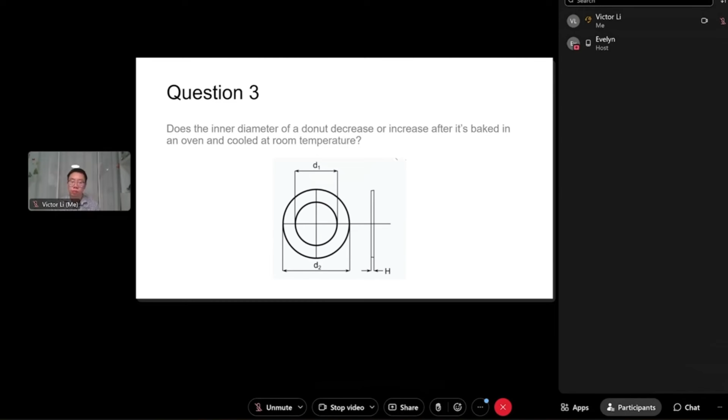I've done about 70 to 100 interviews for various mechanical engineering roles across the United States and China at startups, medium-sized, and global 500 companies. As you can imagine, I've been asked all kinds of different questions. Some were easy, but the majority of them were pretty challenging.

There were even a few that were irrelevant to the role. So in this video, we're gonna walk through and answer the most commonly asked mechanical engineering interview questions based on my experience. If you have an interview coming up soon for a mechanical engineering internship or full-time position, be sure to watch to the end because I'm gonna help you ace your next interview.

I like to sort all interview questions into three broad categories. First is general non-technical questions. These are more open-ended questions that help the interviewer understand you as a person, your motivations, and your career goals. Tell me about yourself and why do you want to work for us are two examples of general non-technical questions.

The second is, of course, technical questions. These test your skills and knowledge by asking you to apply math, physics, and engineering principles to solve a problem. Some examples could be: perform a tolerance stack-up analysis on this assembly. What are the advantages and shortcomings of injection molding and 3D printing? When does it make sense to use injection molding over 3D printing and vice versa?

Third is behavioral questions. These focus on how you would react and behave in specific situations and give insight into things like your personality, leadership, problem-solving skills, teamwork, and adaptability. A classic question is, can you give an example of a project where you had to meet a tight deadline and what was the outcome?

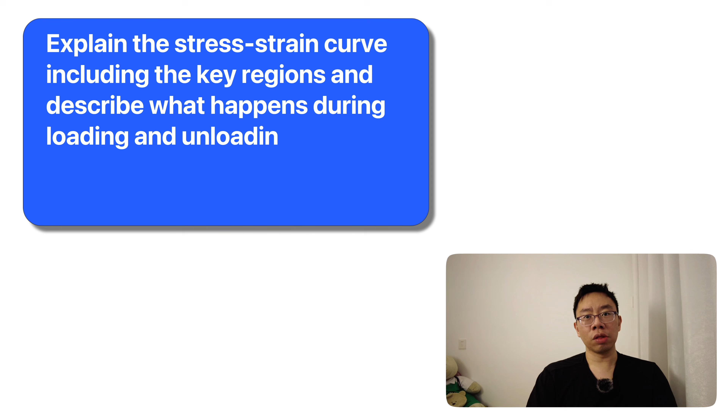So question one is purely technical. Explain the stress strain curve, including the key regions, and describe what happens during loading and unloading of a material. How does this relate to elastic and plastic deformation? This question is relatively straightforward. If you've taken material science, you shouldn't have any problems answering it.

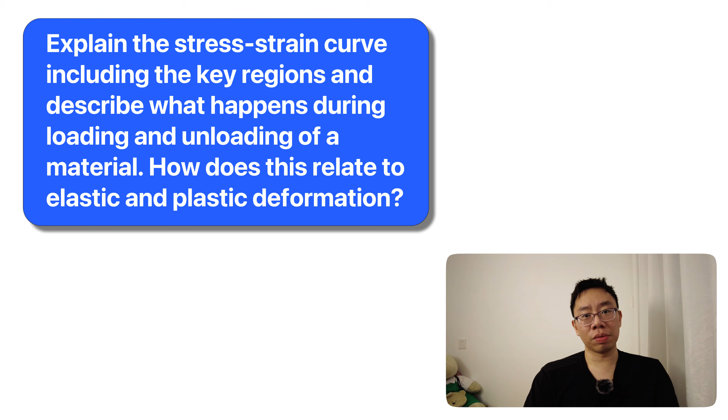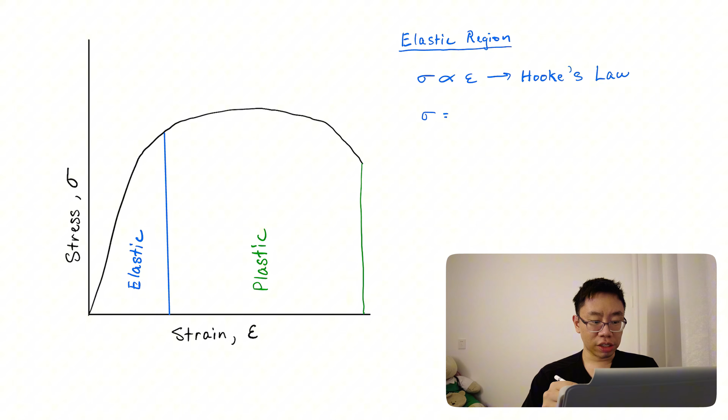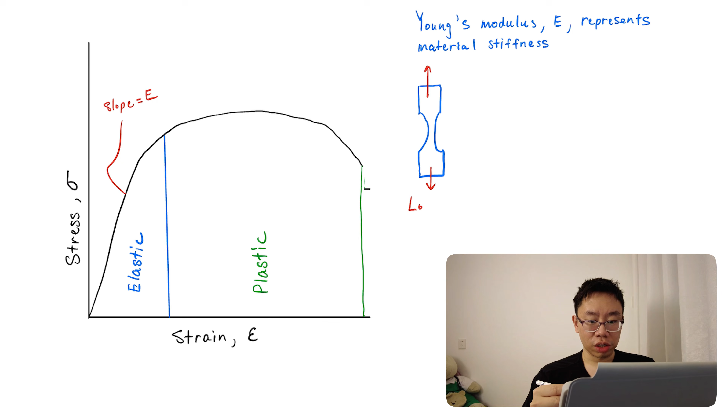So the stress strain curve of a material is obtained by performing a tensile test. It has two regions, elastic and plastic. In the elastic region, which is linear, stress and strain are proportional to each other and is governed by Hooke's law, which states that stress equals Young's modulus times strain. The slope of this line is Young's modulus, which represents a material's stiffness. If a specimen is unloaded at any point in this region, it will return to its original length and follow the same trajectory if loaded again.

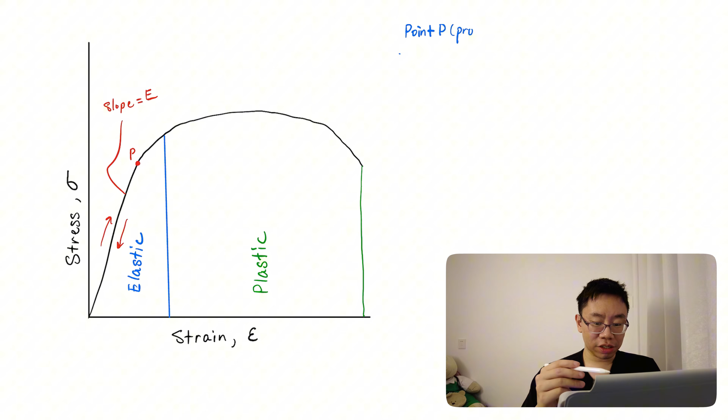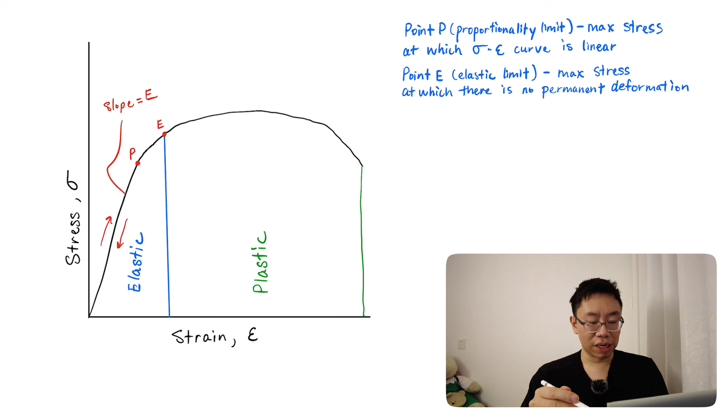If we load the specimen past the proportionality limit represented by P, which is the max value of stress at which the stress strain curve is linear, we'll reach the elastic limit or point E. This represents the max theoretical value of stress at which there is no permanent deformation. Even though the curve is not linear between point P and point E, the material is still elastic in this region. Once past point E, we enter the plastic region where the specimen will undergo plastic or permanent deformation.

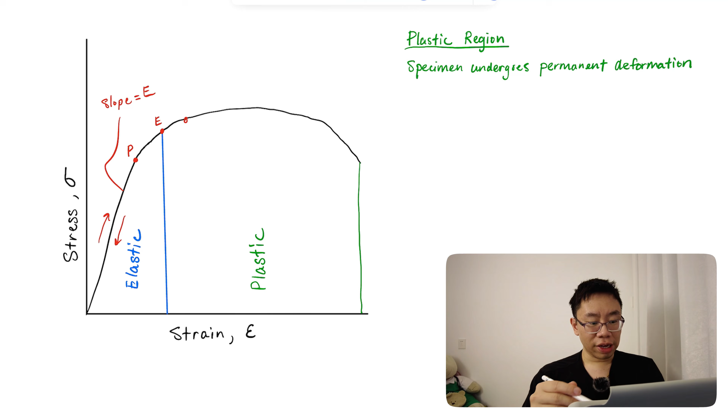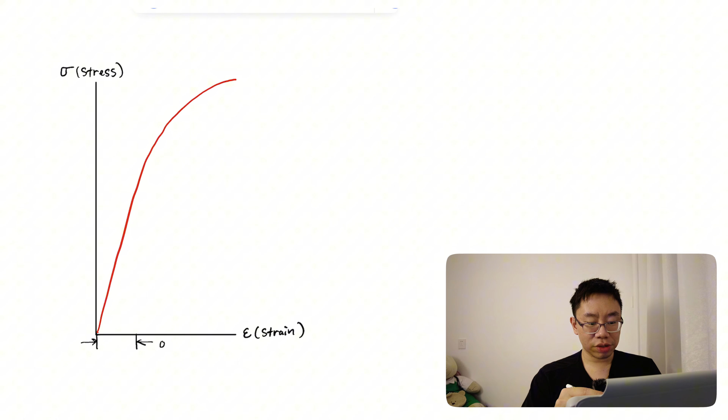Shortly after, the yield point or point Y is reached, which represents the stress at which a small specified amount of permanent deformation happens. This stress is referred to as the yield stress. For materials without a well-defined yield point, it is defined using the 0.2% offset method, in which a line parallel to the linear portion of the curve is drawn that intersects the x-axis at a strain value of 0.002. The point at which the line intersects the stress strain curve is designated as the yield point. So the yield strength is often used in design calculations.

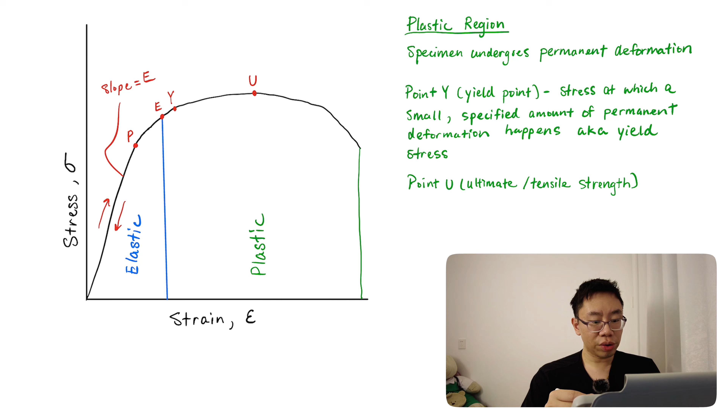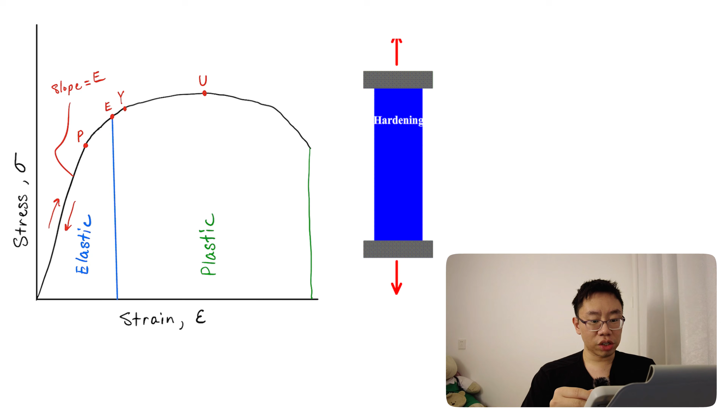If we continue loading the specimen, we'll reach point U, or the ultimate or tensile strength of a material, which is the max value of stress on the stress strain diagram. After reaching the ultimate stress, specimens of ductile materials will exhibit a phenomena called necking, in which the cross-sectional area in a localized region of the specimen reduces significantly. Finally, we reach point F, or the fracture point, where the material fails and separates into two pieces.

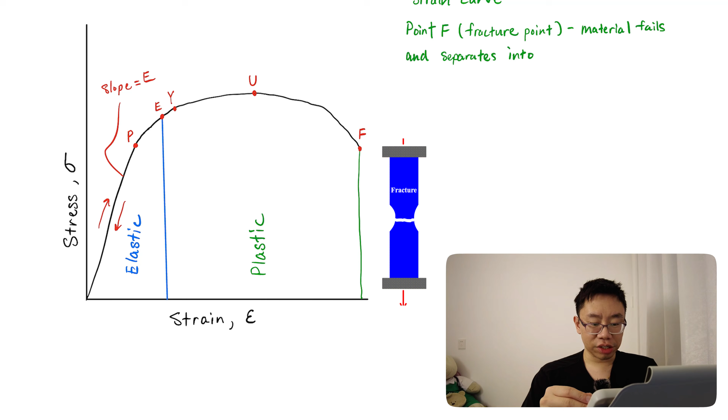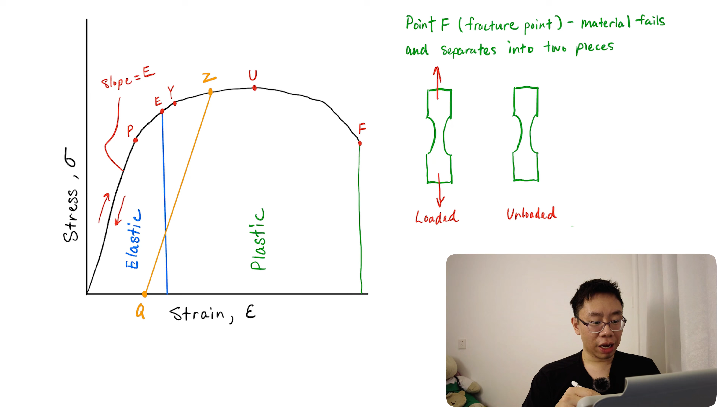Now, to answer how the material would behave when unloaded and then loaded in the plastic region, let's just say it was unloaded here at point Z. After unloading, the material will follow the unloading line parallel to the original, but the plastic strain will remain. So if we load the specimen again, it would follow line QZ, which is the unloading line, and continue until point F, or fracture.

Notice that point Z is now the new yield point, which is higher than the original yield point Y. This is due to strain hardening that occurred by loading the material beyond the elastic limit.

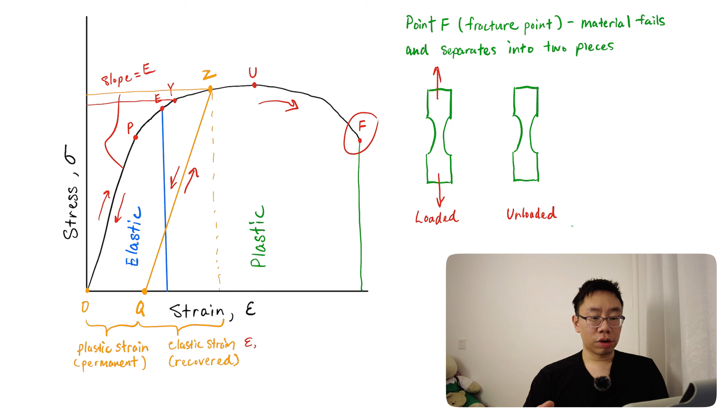It's likely the question will ask you to calculate specific numbers or derive an expression for the elastic and plastic strain of the material. The elastic strain can be calculated easily using Hooke's law, where epsilon sub E equals the stress at this point over the elastic modulus. With the elastic strain, we can calculate the plastic strain by subtracting it from the total strain.

Obviously, there's a lot more to the stress strain curve, but if you mention all the points we covered, the interviewer should be satisfied. You should also familiarize yourself with the stress strain curves of common engineering metals, polymers, and ceramics, and the differences between them. Companies like to ask about important material properties like elastic modulus, yield strength, and ultimate strength of materials like steel, aluminum, and nylon.

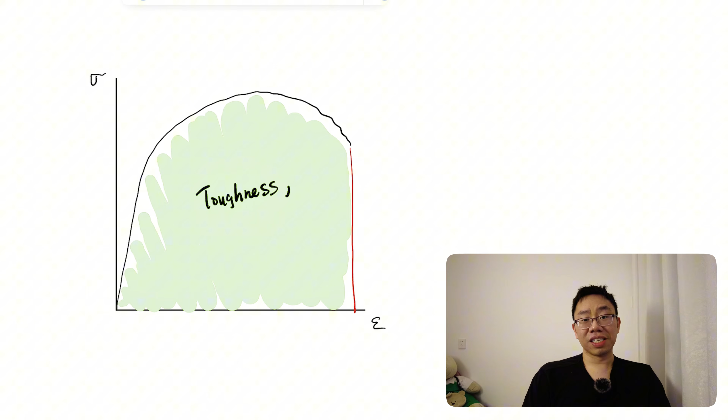A good thing to note is that the total area under the stress strain curve represents the total energy absorbed by the material up to fracture. This is also known as a material's toughness, which is an important property for applications requiring high energy absorption before failure, such as impact resistant composites used in a car's chassis.

Now the second question is very important, but is oftentimes downplayed or overlooked: tell us what you know about our products. This is technically a general, non-technical question, but if you can nail the answer and make it technical, it can be a difference maker in landing the job.

Don't give a generic answer like, I know you make a lot of cool products, or I looked on your website and I know you make a lot of premium laptops. The interviewer is asking this to probe if you did your homework and to test your ability to connect your skills and expertise with the company's offerings. Show that you can relate their products to your skills and background.

Specifically focus on how their products incorporate good design principles, materials, and manufacturing processes, or you can even talk about how you would improve the design. You can express interest in a specific product because it uses cutting-edge engineering or technologies that align with your background. You could also point out that product X presents engineering challenges you're familiar with or excited to work on, such as testing, quality control, or optimization.

So if you're interviewing for, say, a product design or mechanical engineering role at a consumer electronics company like Apple or Samsung, you could say: I've been following your company for a long time and I'm really impressed by your latest smartphone, the Galaxy S25 or iPhone 16.

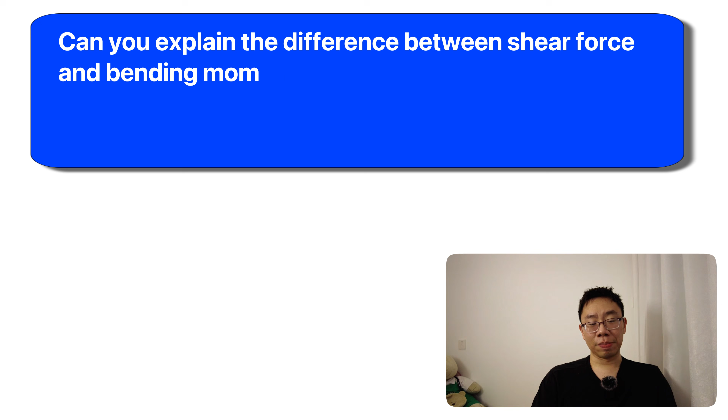Question 3 is a technical question related to beams. Interviewers love beams, so pay attention in your mechanics of materials class. Can you explain the difference between shear force and bending moment in beams, and how would you calculate them for a simply supported beam subjected to a uniform load?

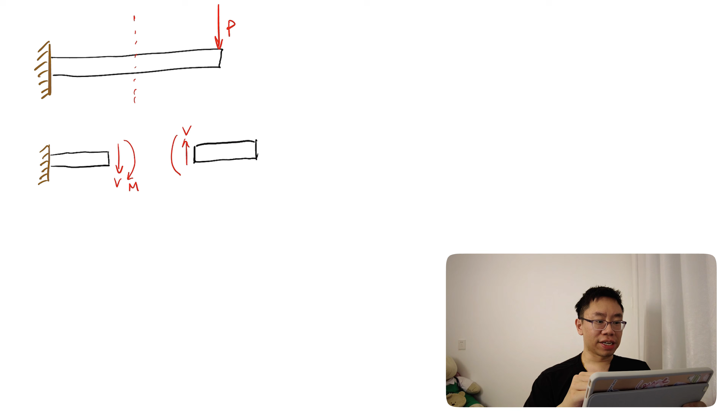In a nutshell, you don't have to say too much here. Shear force is the internal force parallel to the cross section of the beam, and bending moment is the internal moment causing the beam to bend.

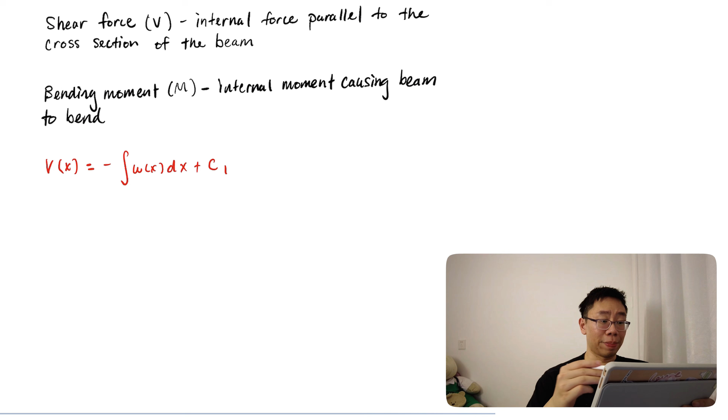Mathematically, the shear force at position X, or V of X, is equal to the integral of the applied or distributed load W of X with respect to X plus a constant determined by boundary conditions. Similarly, the bending moment M of X is equal to the integral of the shear force V of X with respect to X plus a constant.

Now, for calculating shear force and bending moment of a simply supported beam with a uniformly distributed load, if you've already memorized the max shear force and bending moment and their locations for such a beam configuration, you can simply directly explain it to the interviewer.

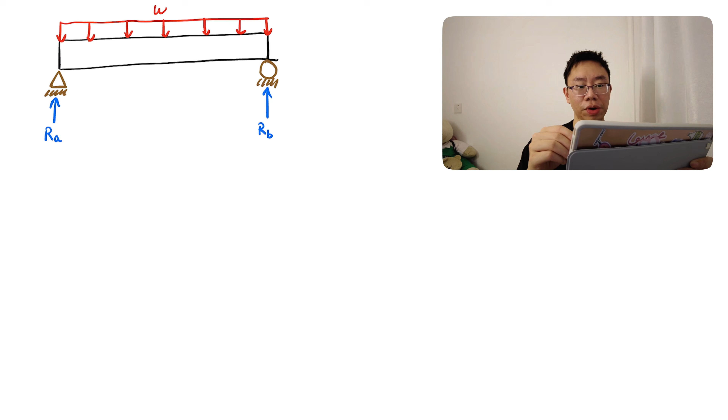However, if you need pen and paper to visualize and explain the steps, there's nothing wrong with that. Just tell the interviewer, I don't want to spend too much time on this, but we can begin by drawing a simple diagram and defining all the parameters. We'll represent the reaction forces as R sub A and R sub B and the load intensity with W. From symmetry, RA equals RB, which equals the load intensity times the beam length over 2.

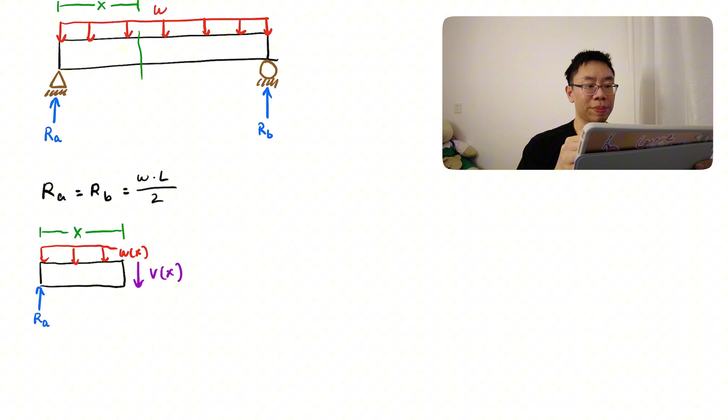To calculate shear force, we make a cut at point X. The summation of the forces must equal 0, and we get V of X equals R sub A minus W times X. The shear force at the left end, or X equals 0, is W times L over 2, and at the right end, or X equals L, is negative W times L over 2.

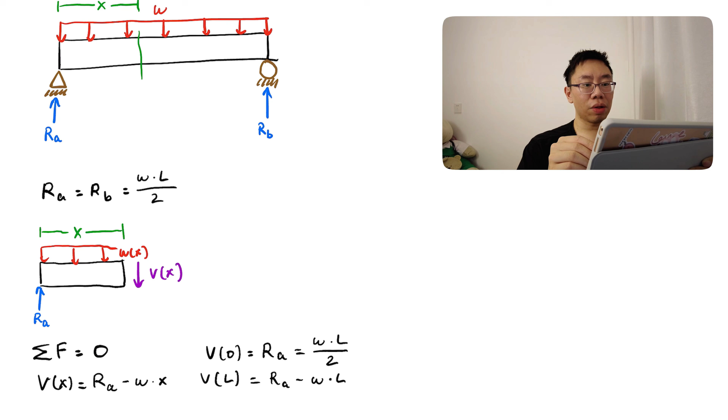We know the shear force is 0 at the middle, but if you didn't know, just plug in 0 for V of x and solve for x, which is L over 2.

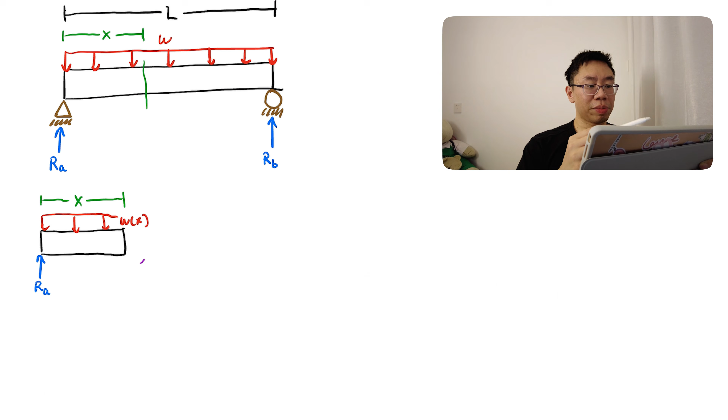Similarly, for the bending moment, the sum of the moments must equal 0. So m of x plus the moment from the distributed load, which is W times x times x over 2, equals the moment from the reaction force, which is R sub A times x. Rearranging, we get m of x equals R sub A times x minus W times x squared over 2.

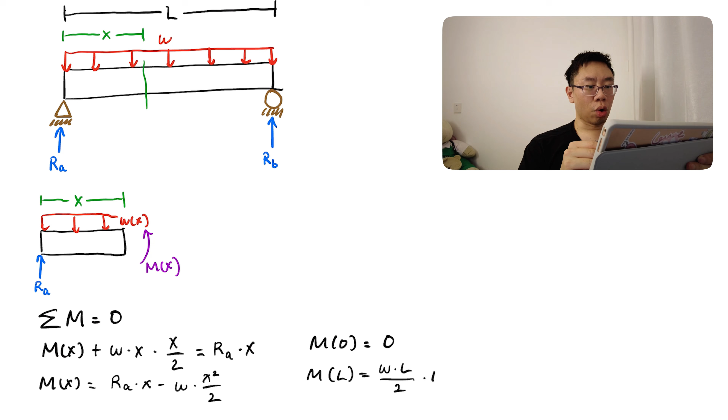The moment at the left end, or x equals 0, is 0, and at the right end, or x equals L, is likewise 0. The max moment occurs at the middle, or x equals L over 2, so we get m of L over 2 equals W times L squared over 8. You could plot the shear force and bending moment diagrams as well if you wanted to, which look like this.

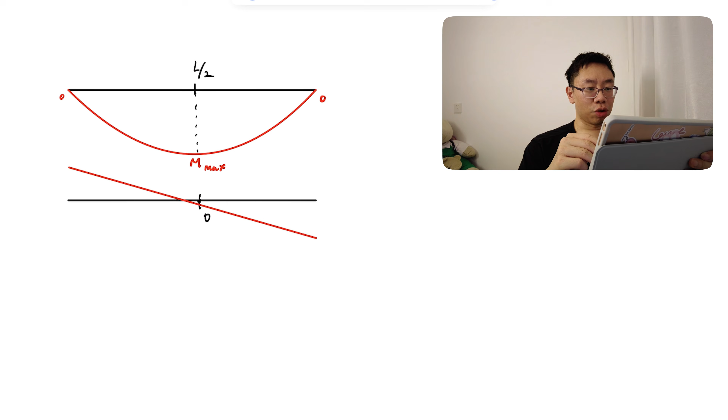Now, question 4 is another beam question. How would you design a beam to minimize deflection under load? This question is fairly easy if you know the parameters that affect deflection. Obviously, the max deflection is different for each load case, but the parameters are all the same.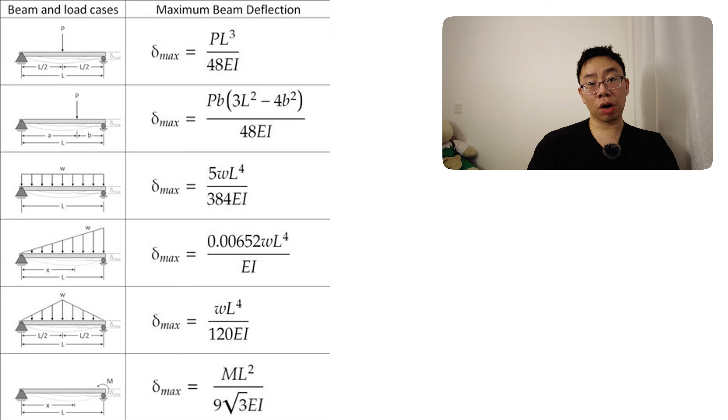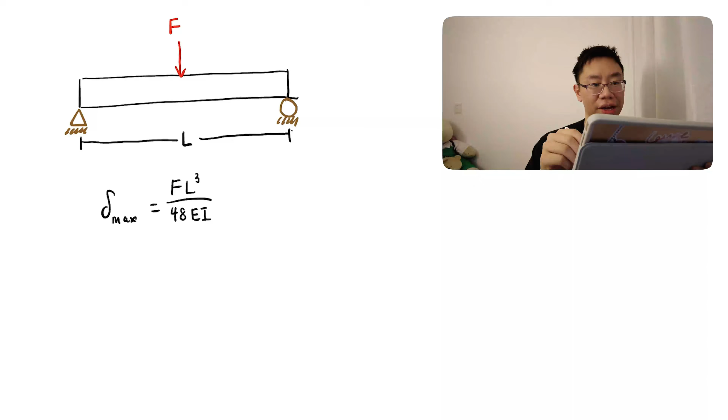The max deflection of a simply supported beam with a point load is given by the force F times the beam length L cubed over 48 times the Young's modulus of the material E times the area moment of inertia I. So right off the bat, you can reduce the span of the beam since the deflection is proportional to the cube of the beam length.

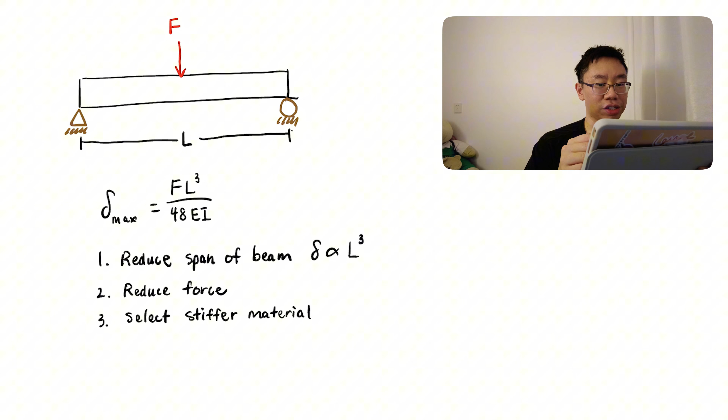You could also reduce the force, but that's likely out of your control. You can, however, select a stiffer material like steel, whose Young's modulus is roughly 200 gigapascals, over aluminum with a much lower Young's modulus of 70 gigapascals.

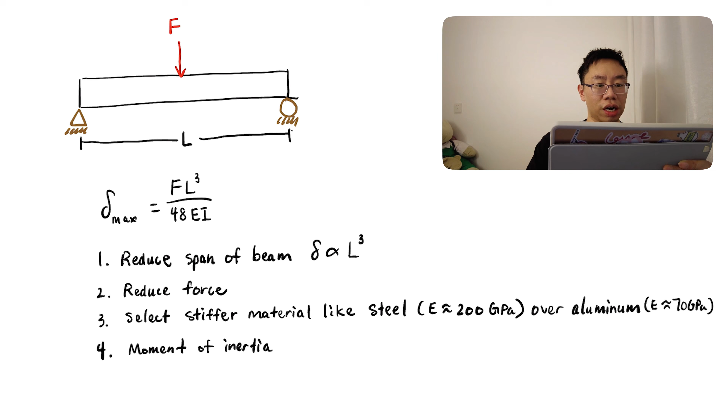The moment of inertia I of a rectangular cross-section is given by BH cubed over 12. So increasing the height of the beam will reduce deflection by a significant amount. At the same time, that would add a lot of extra weight.

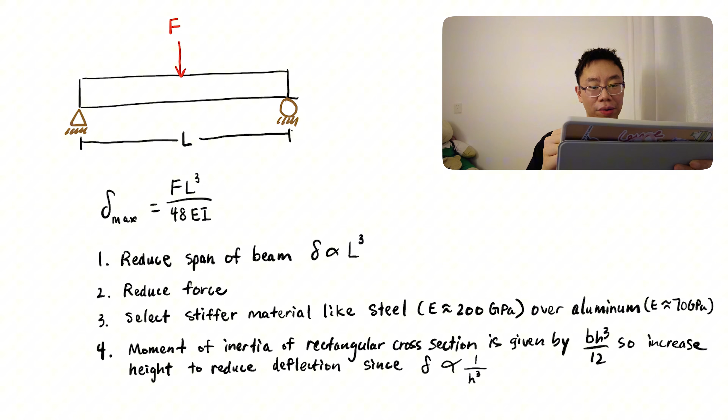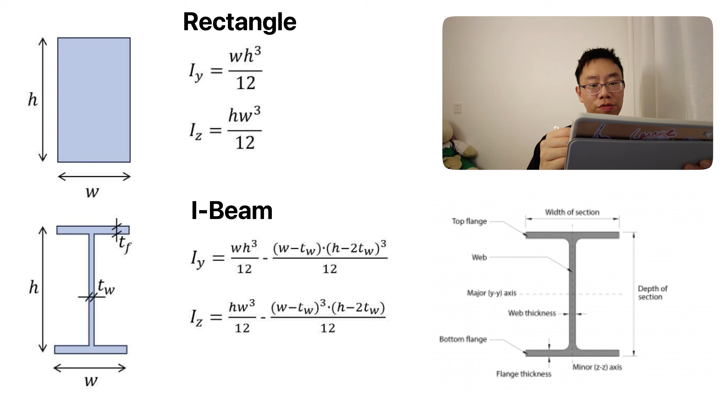So you could consider an I-beam because it has a high moment of inertia for its weight. Its cross-section maximizes the moment of inertia by concentrating material further from the neutral axis in the top and bottom flanges, while minimizing the material near the neutral axis in the web.

Now, question 5 is design related. How would you select the appropriate material for a specific mechanical component? Everyone's process will be slightly different, but you should touch upon several key factors that directly affect the performance, cost, and manufacturability of the component.

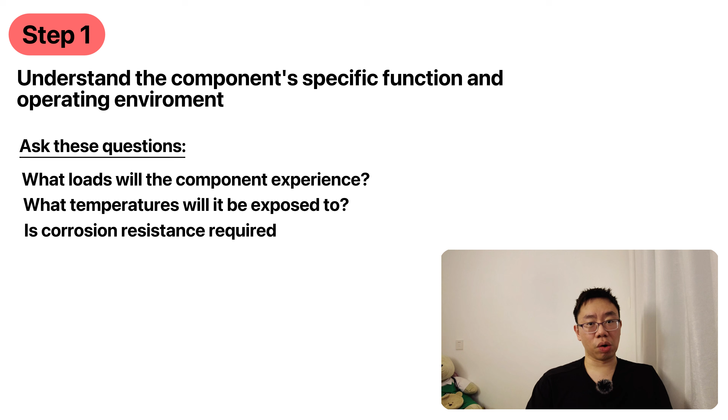The first step is understanding the specific function of the component and the environment in which it will operate. I would ask questions like: what loads will the component experience—tension, compression, shear, and or torsion? What temperature range will the part be exposed to? Is corrosion resistance required? Will it be exposed to chemicals, moisture, and seawater? Does the part need to have high wear resistance? What are the weight and cost constraints?

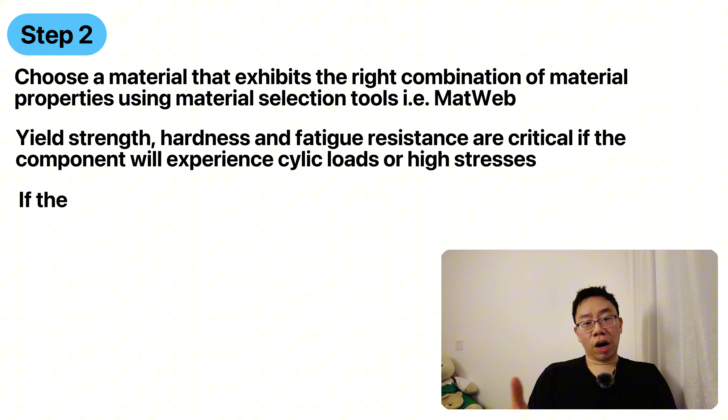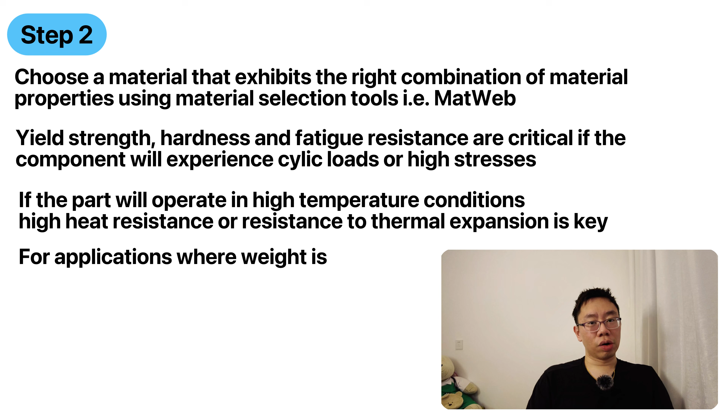Next, I would choose a material that exhibits the right combination of properties, leveraging some type of material selection tool like MatWeb. Yield strength, hardness, and fatigue resistance will be key factors if the component will experience cyclic loads or high stresses. If the part operates in high temperature conditions, I will look for materials with high heat resistance or resistance to thermal expansion. For applications where weight is critical, I would consider lightweight materials like titanium alloys or composites.

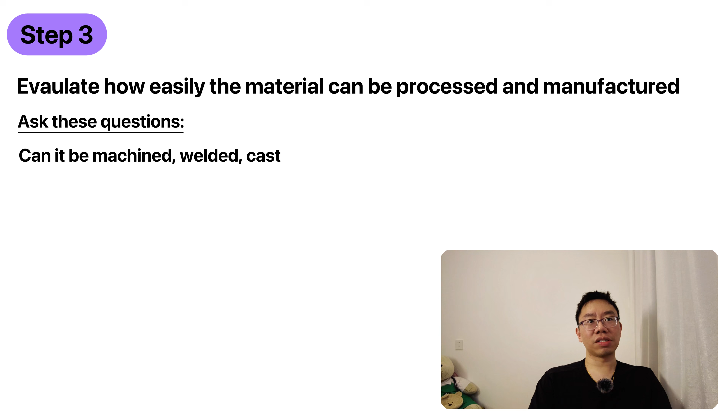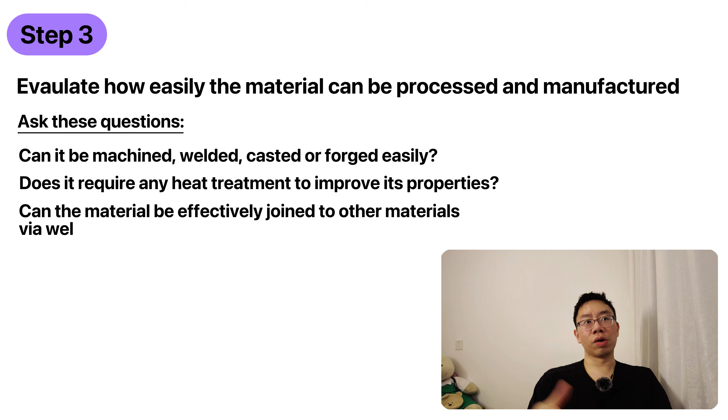Once I have a good idea of the required material properties, I would evaluate how easily the material can be processed and manufactured. Can it be machined, welded, cast, or forged easily? Does it require any heat treatment to improve its properties, such as tempering or annealing? Can the material be joined effectively to other materials via welding, brazing, or adhesive bonding? If the part needs to meet specific industry standards like ASTM or ISO, I would choose materials that meet those requirements.

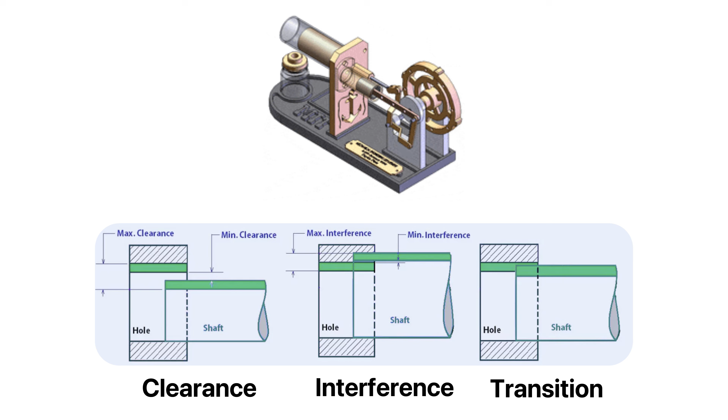When deciding which tolerances are critical, I look at what type of fit is required between parts. For example, in mechanical assemblies, fits are categorized as a clearance fit, where parts are designed to have a gap between them, such as a shaft and a hole that need to rotate freely. Second is an interference fit, where parts are intentionally designed to fit tightly, such as a press fit bearing. Third is a transition fit, where parts could have a small gap or interference, and the fit depends on the specific application. A project that I worked on involved an engine block with height, bore, and deck height tolerances.

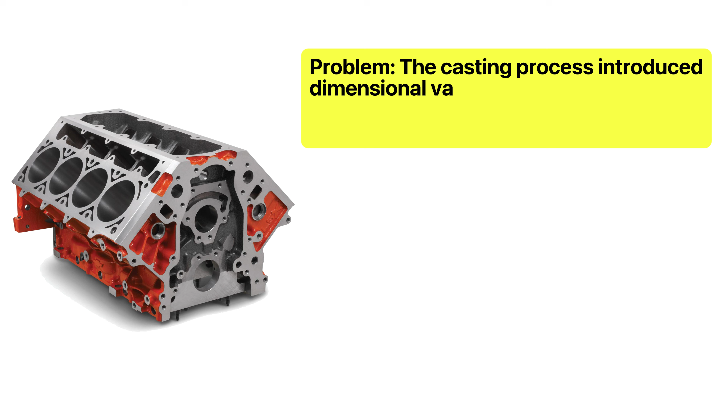The casting process introduced dimensional variability, which caused issues with the piston fit and cylinder head alignment. We addressed this by reviewing the tolerances, optimizing the casting process to reduce variability, and utilizing precision CNC machining to bring the parts into spec, thus reducing scrap and improving overall efficiency.

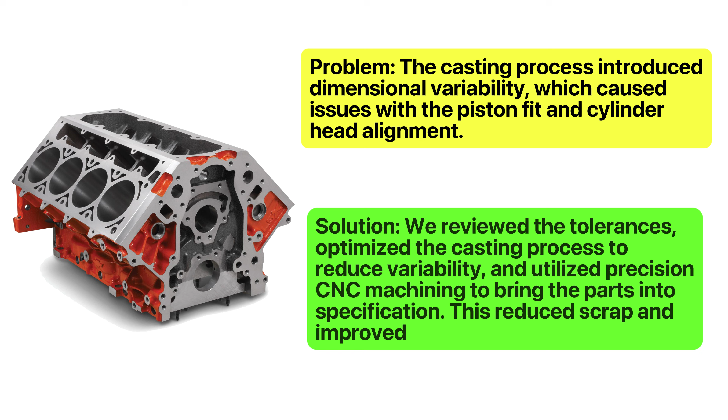Question 7 is, how would you use numerical simulations to streamline the product development process? At what stages of development would you implement these tools and why? For this question, try to relate it to your personal experience. In the early design phase, simulations can allow for rapid iteration and testing in a virtual environment. This helps us to explore different design options, materials, and configurations that might be too costly or time intensive to prototype physically. It also allows us to optimize geometries and load cases early on.

During the detailed design stage, finite element analysis, or FEA, helps refine the design by optimizing the material distribution, weight, and identifying potential weaknesses. This significantly reduces the likelihood of issues during manufacturing and reduces the risk of defects or costly redesigns after product launch. Although simulation tools are not a replacement for real-world testing, it can, however, save significant time and cost by reducing the need for multiple physical tests.

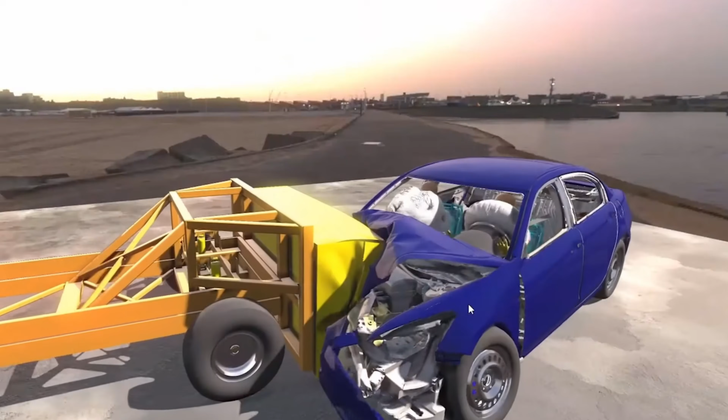I have experience in automotive crash simulations. When designing a new vehicle, automotive manufacturers leverage FEA simulations to simulate crash scenarios like frontal, rear, and side collisions that help assess deformation of materials, the impact on passenger safety, and how the energy is absorbed during the crash. By doing this virtually, engineers can optimize the vehicle structure, crumple zones, and safety features, ensuring that the vehicle meets safety regulations before physical crash testing while speeding up time to market.

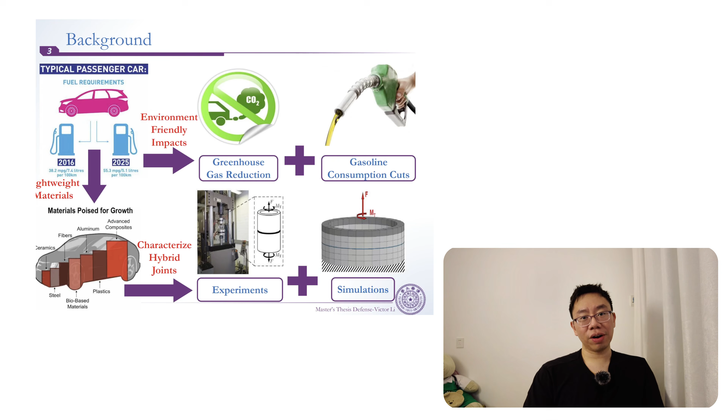Question 8 is, can you walk us through a challenging project that you worked on and how you overcame obstacles? For this question, pick out a project that you can speak to and are proud of. Showing enthusiasm and passion can set you apart from the crowd, even if the project itself isn't that impressive. For my master's thesis that I completed at Tsinghua University, I researched the quasi-static and dynamic behavior of steel, aluminum, adhesive, and self-piercing rivet joints for automotive applications, focusing on their performance under a wide range of strain rates.

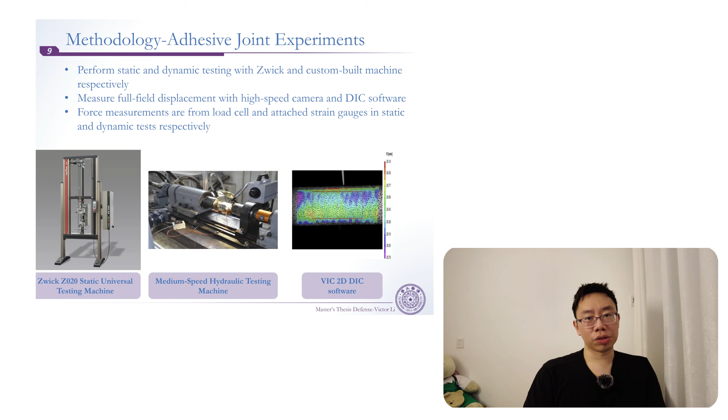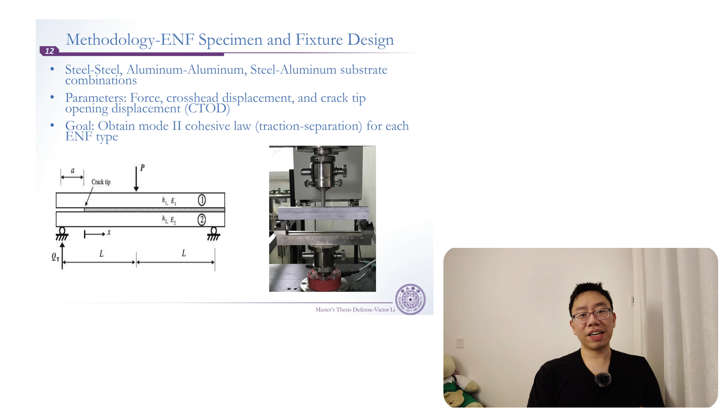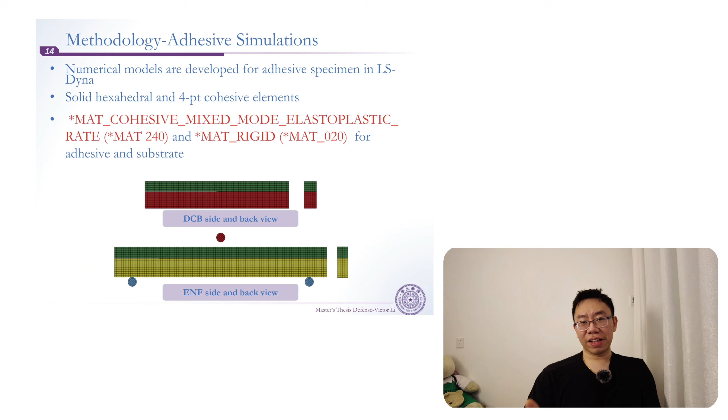The biggest challenge was modeling their complex and nonlinear behavior in LS-DYNA and coming up with a new and innovative approach. I read through massive amounts of papers, collaborated with industry experts for practical insights, and took an iterative approach, starting with smaller models, and validated my simulations through real-world testing. I also managed tight deadlines by prioritizing tasks and setting realistic milestones. The final model significantly improved prediction accuracy, and during my time at Tsinghua University, I was able to publish 3 papers in 3 reputable journals.

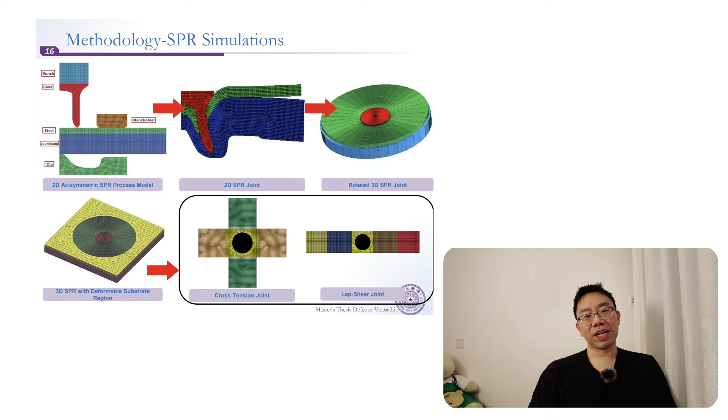This experience not only gave me the opportunity to develop a deep understanding of modeling physical phenomena using advanced meshing, filtering, and fitting techniques, as well as automotive manufacturing methods and material testing, but also taught me how to approach complex engineering problems systematically.

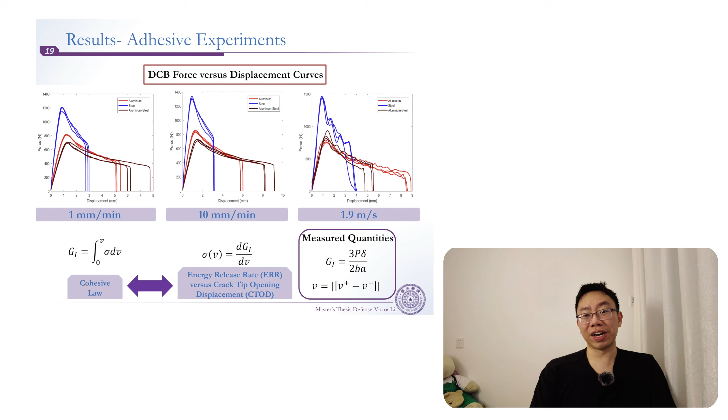These are all skills that I'm excited to bring to this role. Question 9 is both a technical and behavioral question: if you've never worked with titanium, how would you go about designing a titanium alloy sheet metal part?

For behavioral questions, be as specific as possible and tell the interviewer the exact steps you would take. Don't say something vague like, I would just treat it like designing any other metal part. I'd use the same tools and techniques I'm familiar with for steel or aluminum. Titanium is strong, so I probably wouldn't need to worry about it deforming under load. I design the part, send it to manufacturing, and adjust if there are any issues during production.

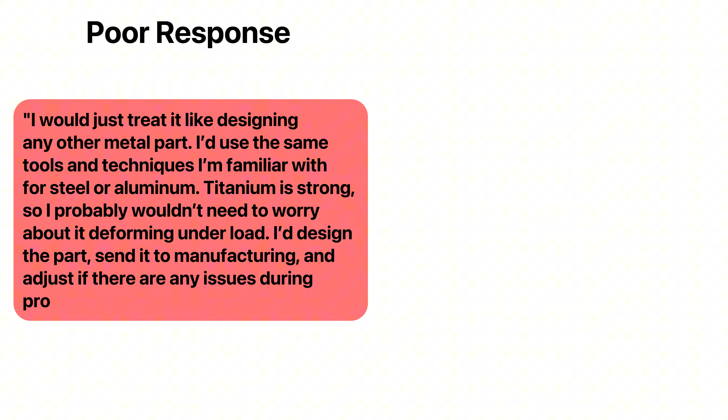Instead, a better answer is: I would start by researching the properties of the specific alloy, such as Ti6Al4V, to understand its strength, corrosion resistance, and formability. I'd also consult industry standards like ASTM or ISO for design guidelines specific to titanium.

Next, I consult with manufacturing engineers or vendors to understand the material's constraints, such as minimum bend radii, spring back, and tooling requirements. Since titanium is less formable than materials like aluminum, I'd ensure the design accounts for these factors, including its sensitivity to galling during forming.

I'd use FEA to simulate stresses and deformation during forming to refine the design virtually, and work with suppliers on sourcing the material and optimizing the design for minimal material waste given titanium's cost. If needed, I wouldn't hesitate to reach out to colleagues for guidance on best practices.

Finally, I'd validate the design through prototyping and testing, focusing on critical factors like fatigue, corrosion, and thermal performance, depending on the part's use case.

Now, for the last question, we mentioned that there's technical, behavioral, and general non-technical questions. Technical questions can be further categorized into engineering related, like beam or design questions, or non-engineering related questions. Non-engineering related questions can be anything from math questions to logic challenges that absolutely have nothing to do with the role.

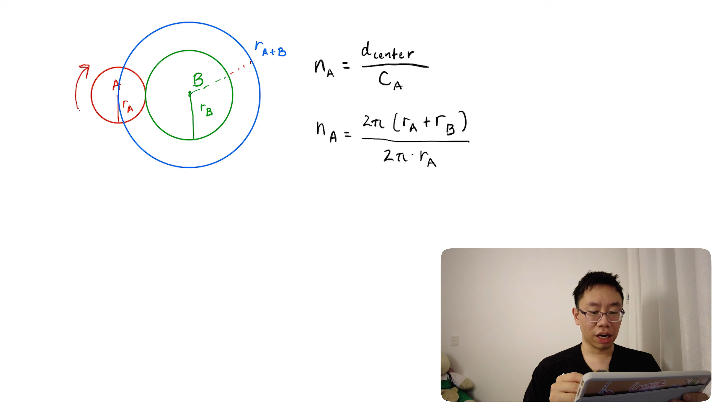The circumference of circle A is simply 2 pi times the radius of circle A, and we get this general expression. So let's say the radius of circle A is 1 and the radius of circle B is 2. Circle A would rotate 3 times traveling once around circle B.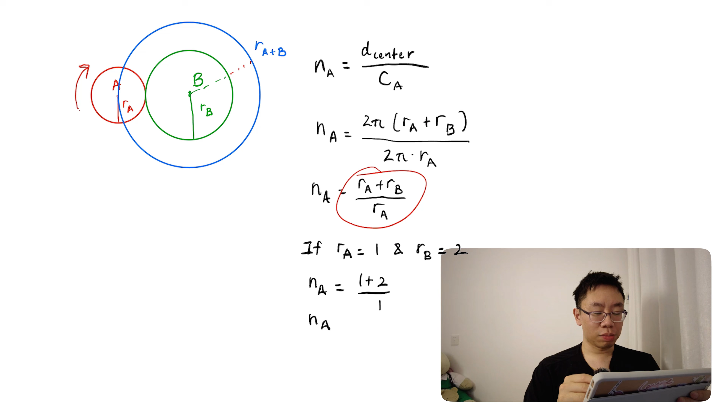Alright guys, so these are 10 questions that I think are awesome to add to your arsenal of potential interview questions for mechanical engineering roles. Feel free to share your interview experiences down in the comment section below. I love to hear them.